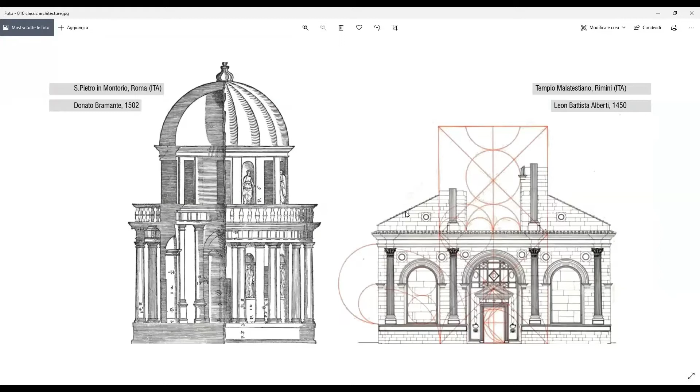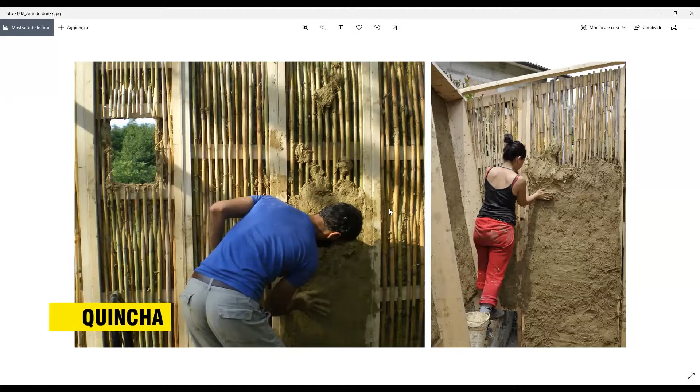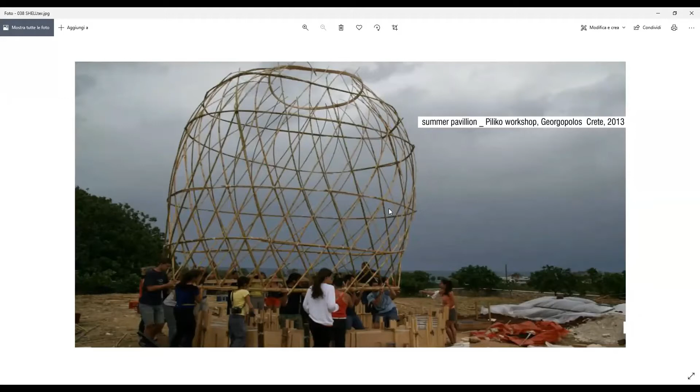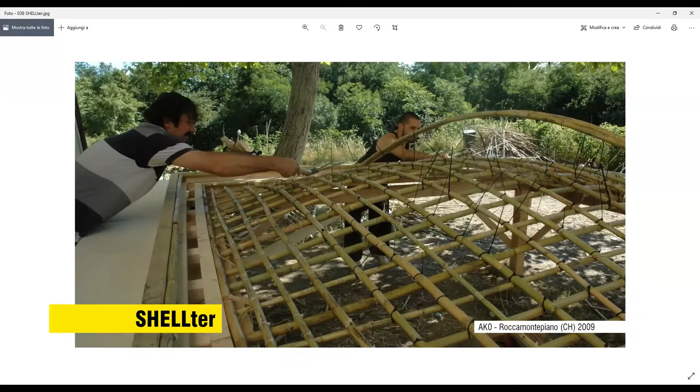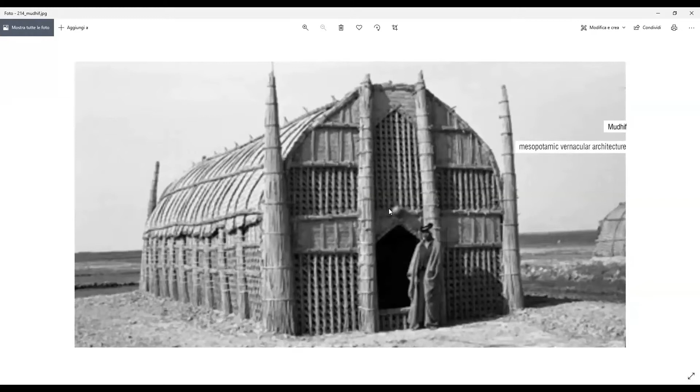So here you can see the rods I'm talking about a bit from closer. This is a little experiment where we did a dome structure with this. But the link to what I was starting from might be found here in the bundles of canes, because this is one of the simplest ways of using this resource, to join it into bundles and to use it as they actually did in Mesopotamian vernacular architecture for construction purposes. So the bundles of cane become the structural elements of the mudhif, as this kind of architecture is called.

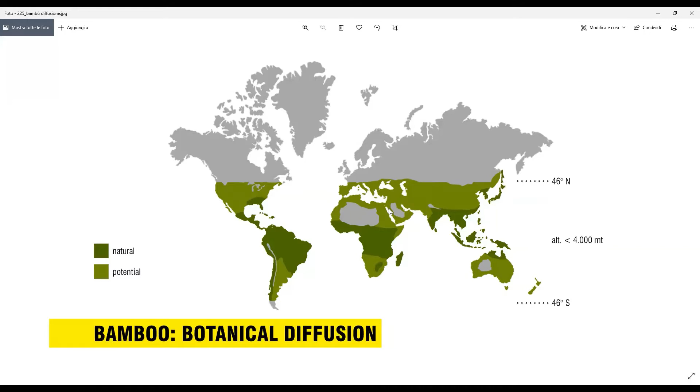But we also have bamboo here in Italy. This is interesting to show probably. Bamboo is, of course, a tropical plant, so it is not native at our latitudes, but it can grow. As you see, the lighter green, I hope you can distinguish it on the screen. Or better, I should say, the darker green is where bamboo is native, more or less. But it can grow up to 46 degrees of latitude. So the Italian peninsula is in that, and there are bamboo groves over the whole country.

Here we come back to Africa. This is bamboo from Côte d'Ivoire, and this is just to show the difference a little bit. We have bamboo in something like 1,600 different species, which also means, of course, different diameters and different strengths. So this here is a bit stronger than the one we have in Europe. We normally don't have more than 80 millimeters. It's already quite an exception to find. The normal is between 50 and 60 millimeters of diameter. Here we can easily find 100 millimeters.

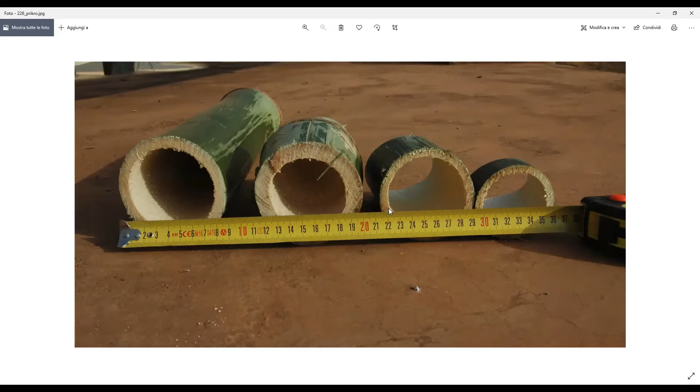And if we go to Colombia or Southeast Asia, we can find much larger bamboo also that can be used for building purposes. According to the dimension of the canes that we use, and here I say canes because it can be the giant reed as well as the bamboo, we don't need to make differences in that case. We can use them as bundles, as I said, if they're very small. So it makes sense to bundle a lot of them together. Or if the cane is strong and big enough, it can be used directly as a building component. The third possibility is to cut the cane in strips.

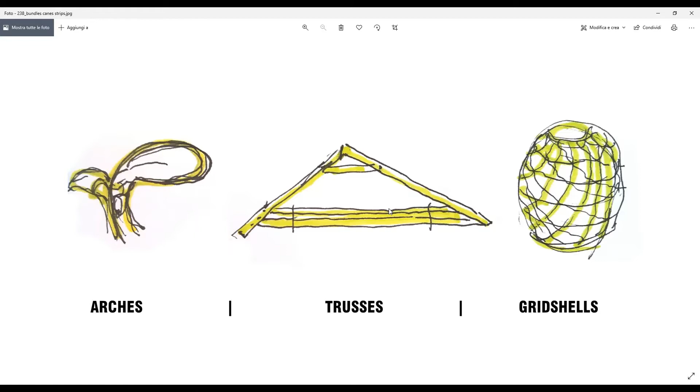Each of those ways of employing the material is also suggesting a way of building structures, of course. We already saw the columns as bundles of canes, but we can also have bundled arches. I will show you an example. We can, of course, have trusses made of straight or sometimes also of curved whole canes. And we can have, for example, gridshells made of strips. As for the canes, I always like to show this example by Cañaviva.

This is an architecture firm from Catalonia. They build structures like this with giant reed, so the Mediterranean cane again. And this is an example of entire canes used within a box truss. This is this solution where you can use 4 parallel canes joined together and held at a distance by other canes from the same kind, let's say. And so this gives quite a strong structural element that can be used as a pillar or horizontally as a beam.

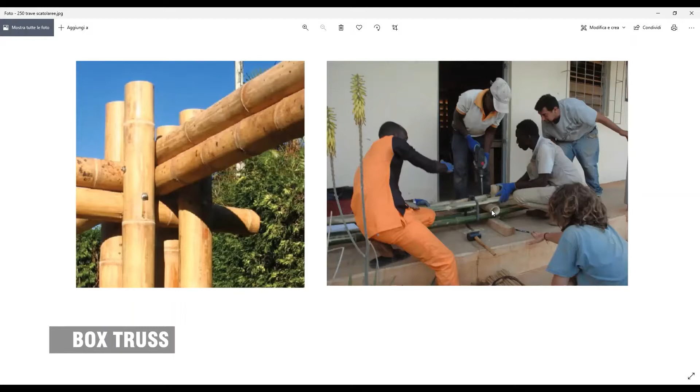The picture you see on the right is from a training session we did in Côte d'Ivoire, where we tried to use the local material because we discovered that there was bamboo available, but it was not used, if not for fences or very simple solutions. So what you also see in this picture, that bamboo is all but straight. Sometimes you find bamboo with very irregular shapes.

This is normal because it's a natural material, but this solution of box trusses with joining 4 parallel canes is, for example, one possibility to compensate this irregularity and still have elements that we can consider to be straight in our design. Let's say we can force the concept here a little bit.

The jointure is made with these wooden elements that pass through, and here, depending on the kind of bamboo, the joint, this is of course a weak point because you need to drill the material, and so this depends on how strong the material is, if it can stay as such or if it needs to be reinforced. But it is a very simple way of connecting the material.

This is what we did within an exchange program with European students from the University of Rome that we brought to Côte d'Ivoire to do a building workshop together with local craftspeople. And here you see some pictures where we also employed other techniques like rammed earth walls.

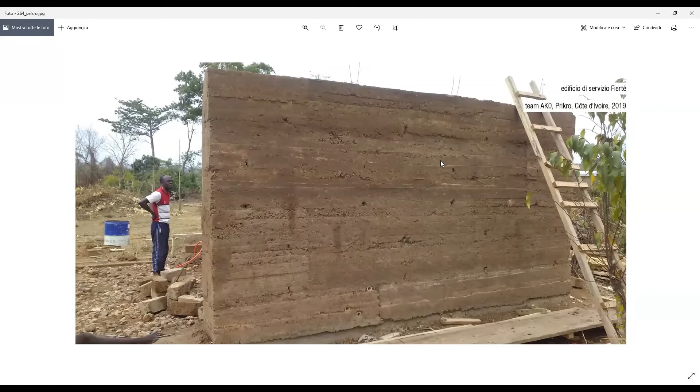And finally, the end product of this experience, of this collaboration, was this small building where you see again we have a bamboo roof made with these triangular beams or this roof structure, and this will then be covered with a straw roof. I have perhaps to mention that the difficulty of this project was that we were ready to start it in February 2020, exactly when COVID-19 appeared, and this made it impossible for us to go to Côte d'Ivoire.

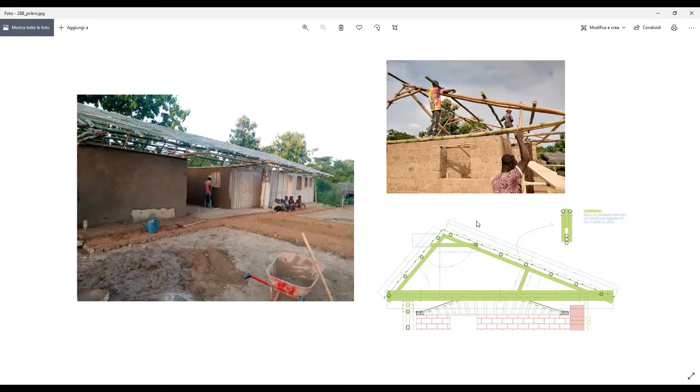So this project has entirely been built by local people, and we just interacted with them like we are doing now with online meetings, emails and WhatsApp calls, things like that. But it worked finally. So some small adjustments needed perhaps still, but the building is there and it works.

This is just another example from people you might know, because this is a published, quite well-known building. It's the school in Rudrapur by Eike Roswag and Anna Heringer. And this is just to show a larger possibility of employing straight canes joined together with nodes in order to have performant structural elements.

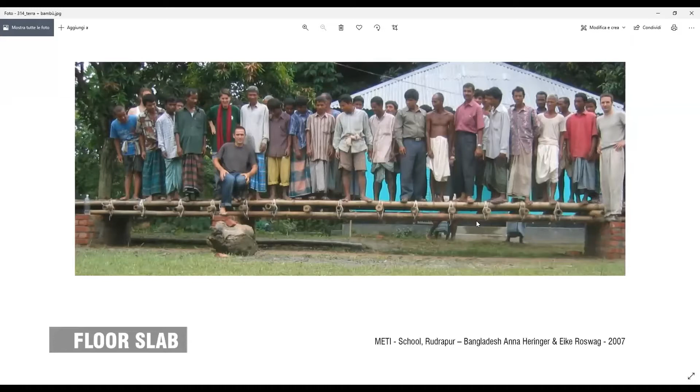This is an intermediate plane where this is the prototype they are using for the floor slab in this building that is made of cob at the lower level, and then completely in bamboo at the first level.

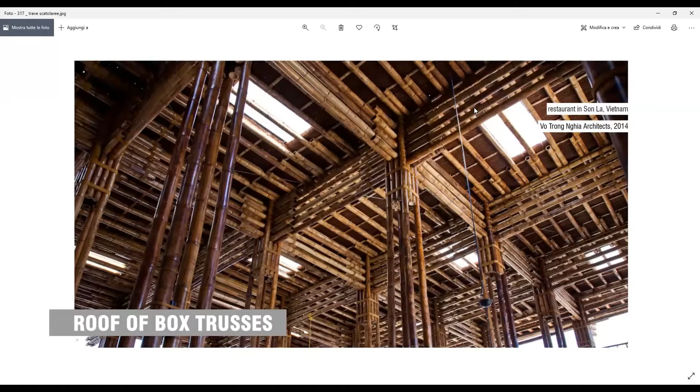Just another example from Asia. This is Vo Trong Nghia, Vietnamese architect who uses also these straight entire canes for this roof structure, where we have again this box concept reinterpreted in a slightly more complex way. Or this is Simon Velez, you also might know, from Colombia, who is suggesting for years solutions like that for industrial buildings or very large public buildings.

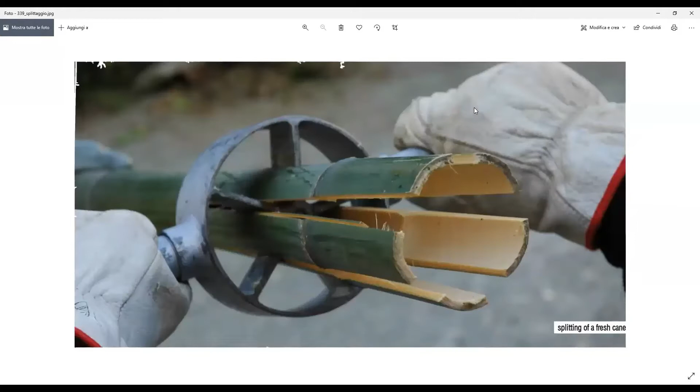As I said, a third possibility is to cut the canes in strips, and this is something, at least here at our latitudes, we do manually with this splitter, this tool that you see in the photo, which has in this case 5 blades, but according to the diameter of the canes and the size of the strips you want, you can use tools with more or less blades, 4, 6, 10, depends.

Or slightly more complex is the 3-axial weaving. This is this particular pattern where you get hexagons and triangles, and actually you can use the triangles to have quite stiff jointures, because you can make the triangle very small, and then the friction between the 3 strips that meet at that point is enough to have a quite performant jointure for the whole structure.

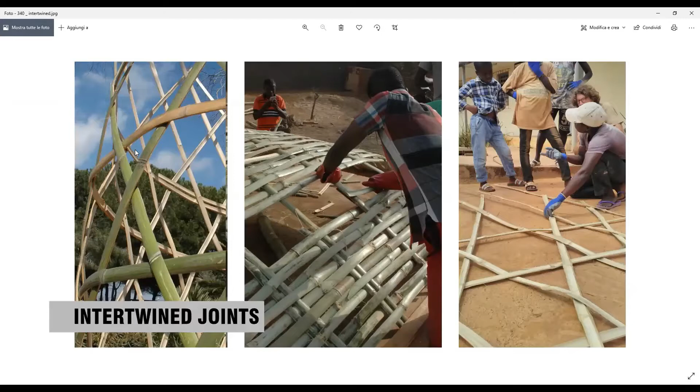This is again the biaxial, so the normal weaving. This is an interior design for a cultural center here in Rome, and this was for an interior design in an apartment. But no, here there's some mixture.

Sorry for that. This is a little pavilion that we were asked to build for a park in southern Italy, in Sicily. And here you see the 3-axial grid shell. This is the same structure within the villa. So very small pavilion. This is the interior design I was talking about before, within an apartment in Rome again.

And so actually this fact of using curved structure, something we discovered is that it really makes sense, because you can have quite stiff structures by using apparently weak material, because the bamboo strip as such is not very strong. It's a few millimeters of thickness of material, and it bends really strongly. But if you involve it in more complex structures, it can bring to very performant whole structures.

And there are mainly three methods to do that, depending on how much control you want to have on the design. Sometimes it's needed to have a very exact design, because you have constraints of some kind. It can be the client's desire, maybe constraints of budget, maybe constraints coming from the context, because there's already something built nearby and you have to refer to it in some way. Things like that can ask for a very controlled geometry.

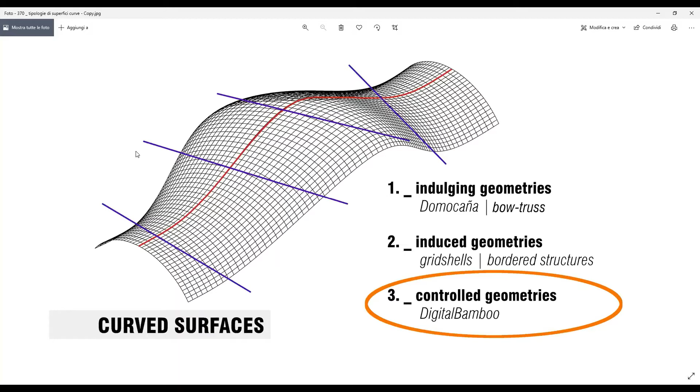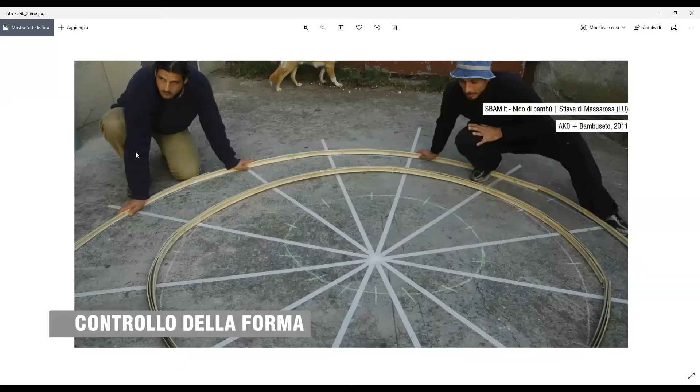So here we did a little experiment some 10 years ago, where we wanted a certain shape of a pavilion, of a grid shell. And so we started to draw some representative shapes of this form on the ground. And then we knew about the heights that we wanted. And all of this, very analogical, very manual, and very empirically, led us to have this little structure here that you see on the left, which had actually the form we wanted.

Because as you saw perhaps before, with the pavilions made with the three-axial patterns, you are quite constrained as for the shapes that you can have. They always look a little bit like an egg. They're quite nice shapes. It's nice to stay inside a pavilion like that. But if you want to go further to have other shapes, it's quite difficult.

Here we could have this difference because we constrained the nodes directly. It's not a three-axial pattern with the triangles as you saw, but we have bolts going through the nodes. So we drilled the material. But on this, we then went one step further, which is this pavilion, which is visitable in Rome, in the Casa dell'Architettura, the headquarters of the architects' chamber.

And so they have a little garden in front, in the center of Rome, and they decided to install this pavilion, mainly to protect this archaeological area behind, because they wanted people to go quite close to it, but they shouldn't touch it. So this was the solution that we proposed. And so this is a place where you can sit and look at these ruins or just have a rest.

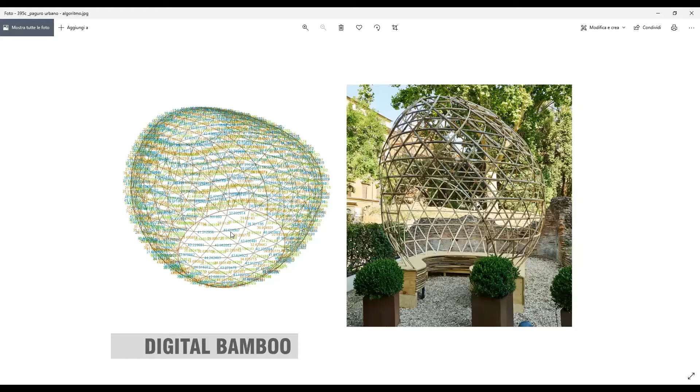So from that, the next passages are completely manual. This is something that normally does not happen with digital design. We are used to having digital design processes that feed their information into a machine, and then the machine produces numerically controlled output by means of a mill or a laser cutter or whatever. In this case, we do it manually, which is the secret to using natural material, because we haven't solved until now the possibility to feed a machine with a material that is irregular like bamboo is.

Each strip of bamboo is different. It never has the same size. The distance between the nodes, where the cane is a little bit harder, is never the same. And so this makes it very difficult to feed it into a machine. So this passage is made manually, but with the help of this assembly map. So the guy or the lady who has to drill the holes knows that the hole G10 has to be at 42.8 centimeters from G11 and so on. So you can have a prefabrication process, prepare all the material, bring it to the building site, and then reassemble it according to this map.

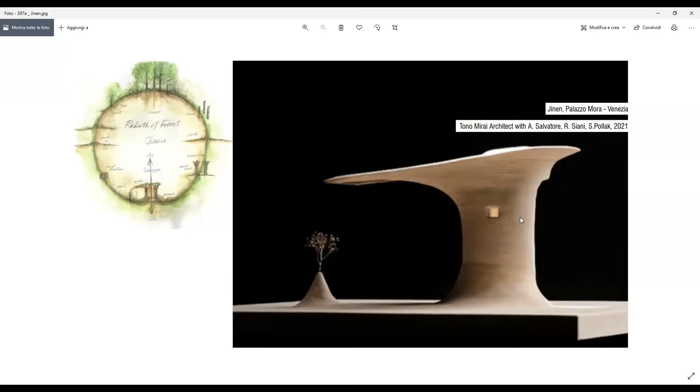This is what we also did in another case where we were contacted by Tono Mirai, a Japanese architect, who was invited to do an installation for the Biennale in Venezia. And his first idea was to build this kind of structure in raw earth on the terrace of an old palazzo, an old building in Venice. Of course, the authorities didn't allow that, because they said you can't build such a heavy structure on an ancient terrace. And so he had to find a plan B, and the plan B was doing it with digital bamboo again. And so we tried to design a shape together with Rossella Siani and Antonio Salvatore, another colleague who was involved in this design process.

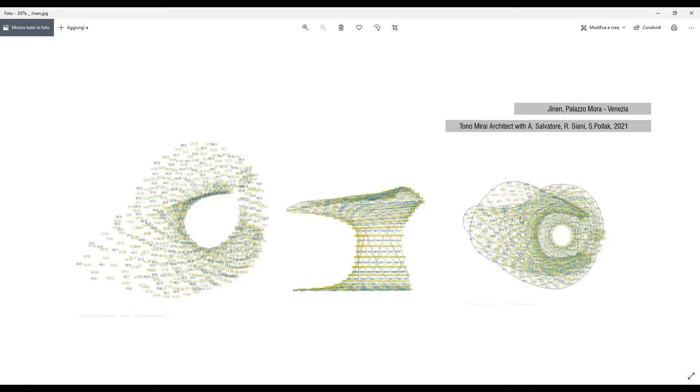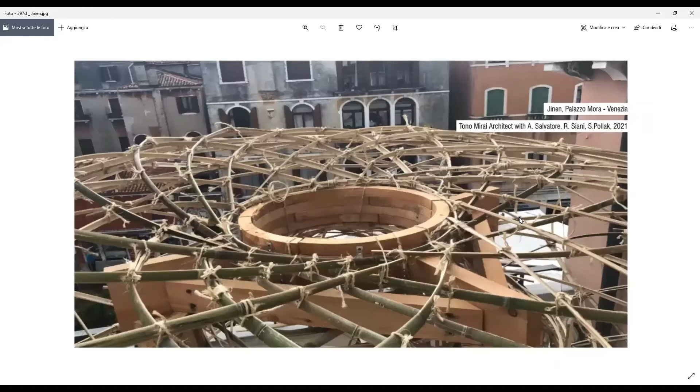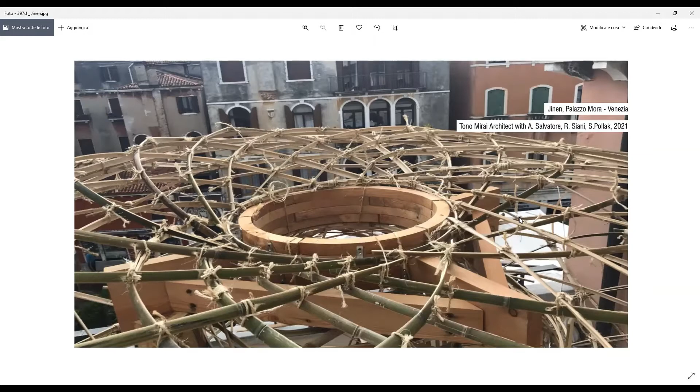And so the shape was redesigned with this method. And again, we had our assembly map that allowed us to build this installation. Here you also see the place. If you have a look at the joints, they are made directly with rope, with hemp rope. This was an explicit request by the architect. He wanted to have only natural materials. He didn't even accept the metal bolts that we used in other projects. So here you see the final installation. The central cylinder was then covered with an earth plaster, but the external shape is exactly like that.

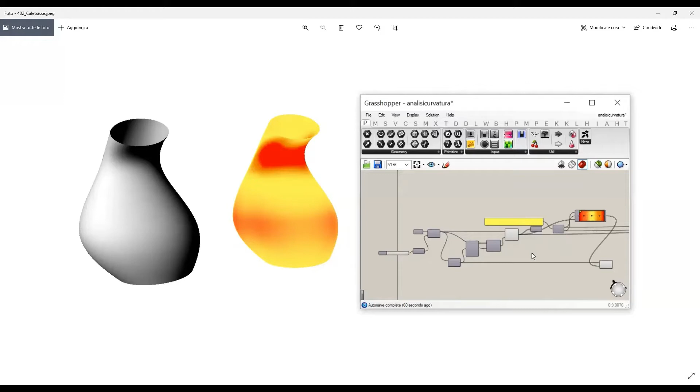What this drawing is representing is the curvature, the bending radius of each single cane. So we knew from the material the critical bending radius, the radius that we couldn't go smaller than. And so we fed the software with this information, which means that when we change parameters like the height or the central diameter, we can stretch this shape as we want while designing, but the software can warn us, saying, hey, pay attention, here is a red zone, here you will have problems with your material, please redesign, more or less, okay?

And then again, once the design was concluded, we plotted this assembly map, and with this assembly map, we went to the building site, which was here in a tent in front of the Congress Center in Kigali, and with the students from the university, we assembled this little structure in 6 hours, more or less.

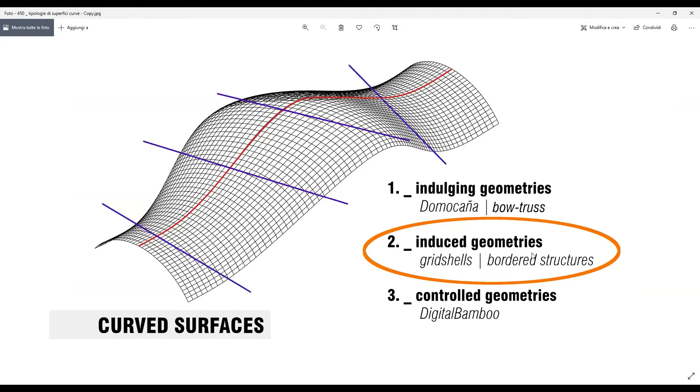Okay, but we don't always need, or we don't always have the possibility to use software. We can have other approaches, still having induced geometries, meaning approaches where we first design, because we need to design it in a certain way because we have our design constraints, and then we want the material to adapt to that. This can be done. I will show you two possible approaches for that. One is to work on the border conditions.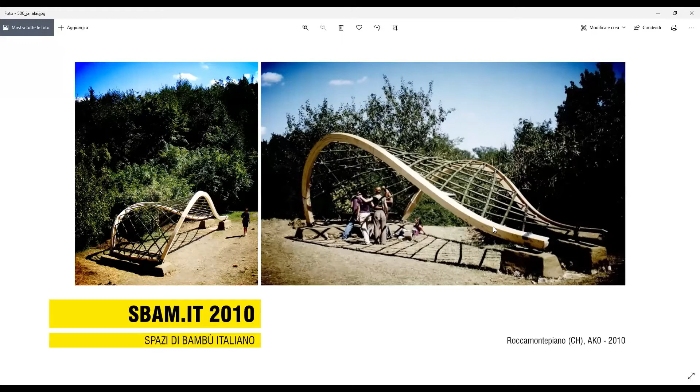So the example you see here is a shading pavilion in front of a youth hostel in central Italy. And what we decided to do here is to have very strong glulam borders made of timber. They give the direction, more or less. They steer the design, and then we have the bamboo grid that needs to adapt to that. But this is somehow freezing the position of the bamboo. Okay, this structure was then covered with a membrane just to make more shadow and also to be protected from rain.

The second possibility is the grid shell approach, where you start from a bidimensional pattern and then you just start lifting points. This works very well when you have patterns like the triaxial pattern, for example, where the canes can still slide a little bit between one another, so they can reshape while reaching the final shape that you want.

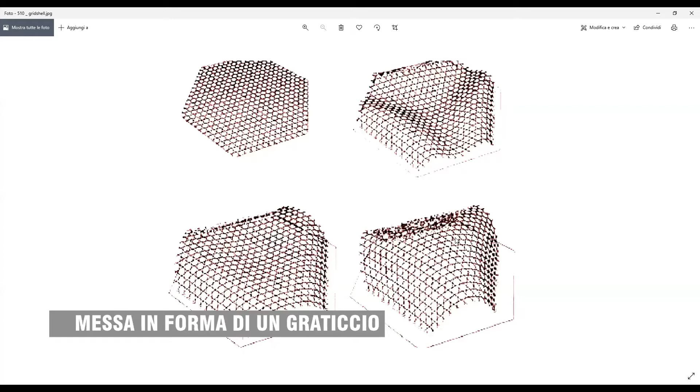Once you are happy with the shape, then you can freeze this by augmenting the friction between these strips in some way, by squeezing them with some additional bolts, or by tying them with ropes, or in any other way. But you can define the shape while doing it, just inducing the geometry you want, starting from a bidimensional pattern.

This is another example where we used the same approach to do the secondary layer of this roof structure. We already had these bent beams that you see in bamboo, and so this layer of triaxial grid was just posed on them, and it adapted to it, but it was woven on the ground, so bidimensionally, before bending.

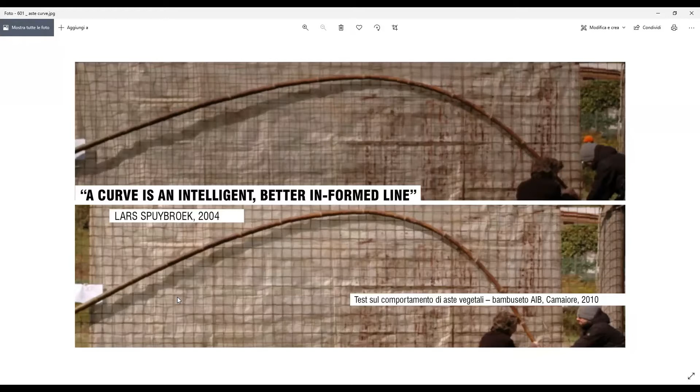And this brings us to the third possible approach, which is based on the fact that bamboo has a very typical way of bending, which depends, of course, on the fact that bamboo is stronger at its base and then becomes weaker to the top. And this corresponds to a typical bending radius. You see, it's not an arch, but it's a bit closer here at the end and a bit larger at the beginning. But it is something that you can really feel with your hands. If you take this cane and you start bending it, you really feel what the material wants to be. And this makes it very easy to communicate on the building site.

You don't need to have all these complicated things that we had before, a myriad of numbers or things to tell to craftsmen. Here in this case, it's just one measure. You say you want this distance to be, let's say, 1 meter or 90 centimeters, whatever, and of course you need the length. But then the rest comes. The exact shape comes from the material. It's the material which determines what it wants to be.

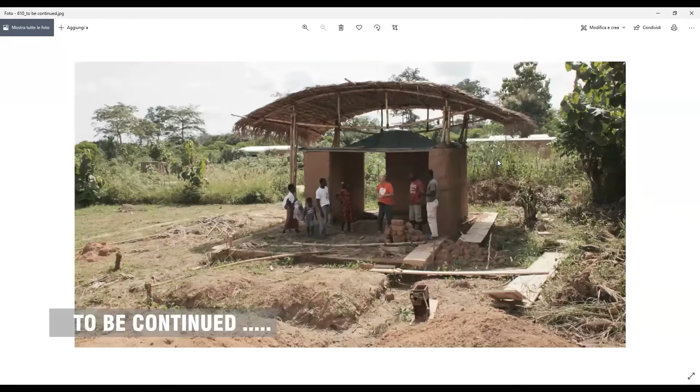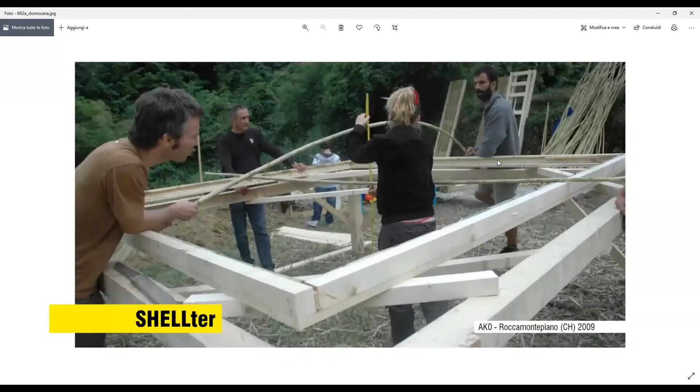So this was the prototype for a roof structure for our little building in Côte d'Ivoire. We then changed this roof because it was not possible to cover. The slope was not strong enough to have a completely natural roof, which we wanted, and so then we passed to the triangular solution that you saw before. But the beam itself was quite strong, so this can be used as a solution. Again, what does it mean to work with so little information and to have the design led by the material? So this is what I'm calling inducing geometries.

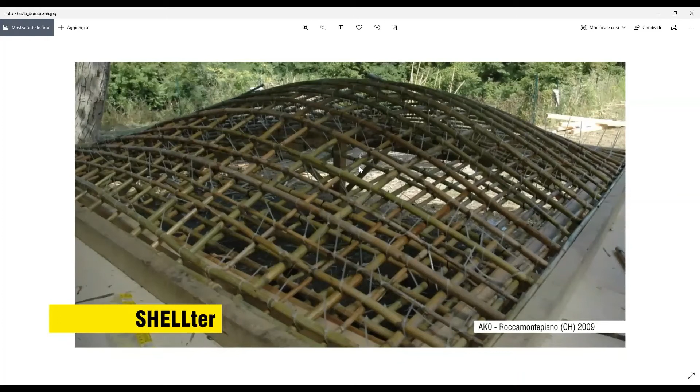Here we are building a dome structure called Domocaña, which is a Peruvian invention that we adapted. And the lady in the center here is just measuring, for our curiosity, to know how high this arch could be. But actually what you do when you build such a structure is to start bending the canes. Normally the first 3 or 4 crack, you have to throw them away, but then you find the right dimension and you can go ahead and have structures like these, which are really strong. We got on top of that with 5 people without any cracks. And it can take even much more load.

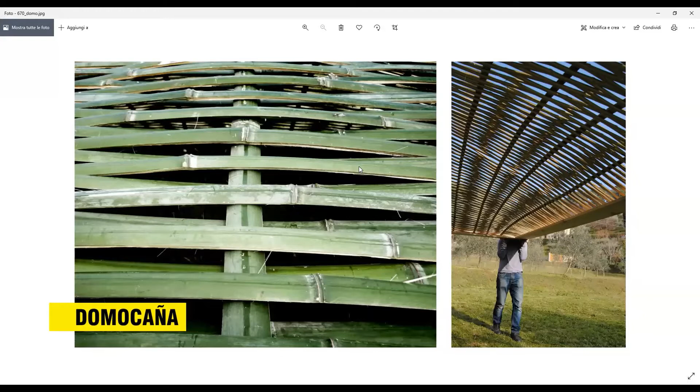This is the same issue but made with bamboo strips, while the others were made with reed canes. Here you see, okay, this is not the heaviest person in the world, but you see that it's quite resistant even with these weak strips.

And so with that in mind, we did another workshop again in Côte d'Ivoire, where we tried to build such a roof structure with a group of beekeepers, because we were invited to participate in a meeting of this association of environmental activists and beekeepers. And so they asked us to introduce the concept of sustainable architecture, and we decided to build such a roof structure.

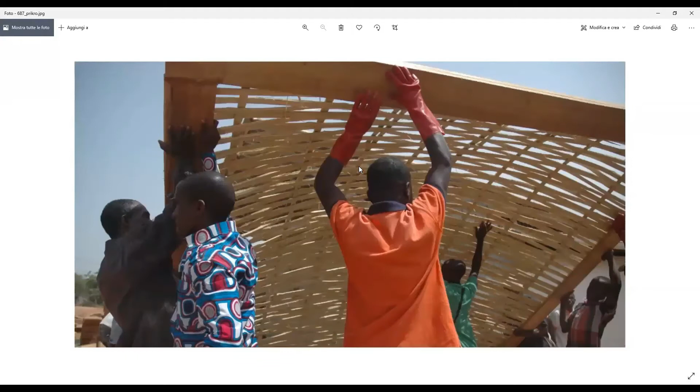And again, it proved that it was really easy to make the building concept clear without complicated drawings, without numbers or things like that, just because the material already contains a lot of information on its own behavior. I would almost say, bamboo already knows what it wants to be. And so this made it easy to weave this dome, which was then relocated and brought to a piece of land that this association owns.

So here you can see the movement with a pickup, and it was brought here on this terrain. Again, in this case, to be used as a shading device, but actually this can be a proposition for a roof in these climates where the bamboo canes are available and can be even more available because the climate is suitable. So we can also think about growing more of it.

And it's really involving. This is perhaps the most interesting aspect of this. You don't need to have big previous preparation, because the material really helps to involve all kinds of people in this building. Of course, what is not solved in this picture that you see is issues like the waterproof layer, or other things that are very important to really be building.

In this case, this solution here was used as a false ceiling under an existing roof. So it was not the issue in that case, but this is something where further investigation is probably necessary. And I'm happy to hear from Randy that there's one topic of local talks on tropical roofs. So perhaps I should have a look at this. Probably some answers are already there. Okay, that's it from my part.

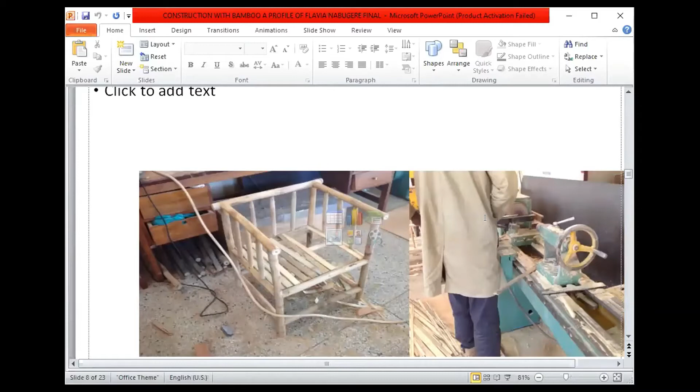We make structures like furniture, and somehow we are learning how to manipulate bamboo so that we can make better structures. I was looking at the presentation before, and I'm like, when do we get there? Because for us, we are simply at the very stages of trying to see that bamboo can be used for any products that can be marketable.

And that does not mean that bamboo has not been used for construction in Uganda. There are tribes or areas like in the northwestern areas of Arua and Moyo, they use bamboo for construction. They construct using bamboo in a very local, simple way. And I liked it so much because we have been worried, thinking we really need so much technology.

When the architect, the presenter before, said that the bamboo itself is the one that leads you or guides you on how to manipulate it or how to handle it. And so that is what we are doing. We can train and guide in nursery establishment. We also offer a promise of a market to bamboo farmers.

Now, I'm going to talk about bamboo for construction. This bamboo has to be treated to prevent attack by borers. We have had so much experience. As we started using bamboo, we would get disappointed when we find it crumbling into powder. As I looked at the first presenter presenting that final product of the structures, we also tried, only to find that ours would be eaten by borers.

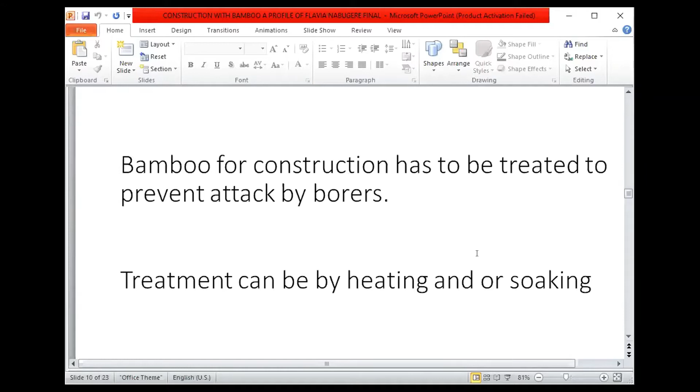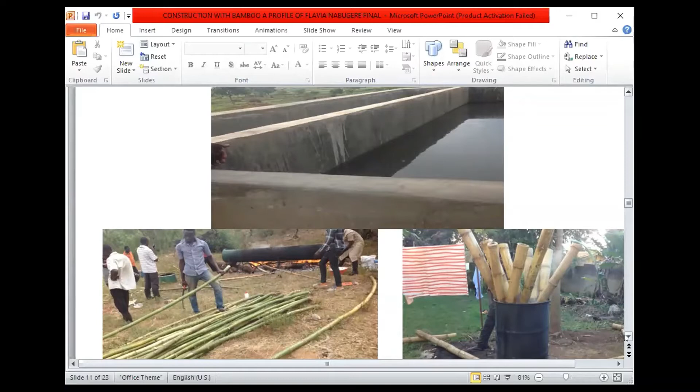facility. And then in a simple way, this is at our place in the city where we have the demonstration here. It is in the rural area. So we have again to improvise to be able to boil our bamboo in this drum. And what we do is to cut very short ones, and then we turn them round so that we don't have to struggle so much.

So construction using bamboo. Bamboo offers low-cost construction materials. Yeah, when we have tried to use timber cut from these other trees, they turn out to be quite expensive, but bamboo is rather cheap. It is available, it is all over. The only problem is what kind of bamboo, how mature can it be?

At Uganda Bamboo Association, we offer bamboo raw materials which can be used for construction, which can be used for other products like furniture. But we also pile up the bamboo which would be useless, to use it for energy. We offer training in handling bamboo. And also we source skilled builders to use bamboo for construction.

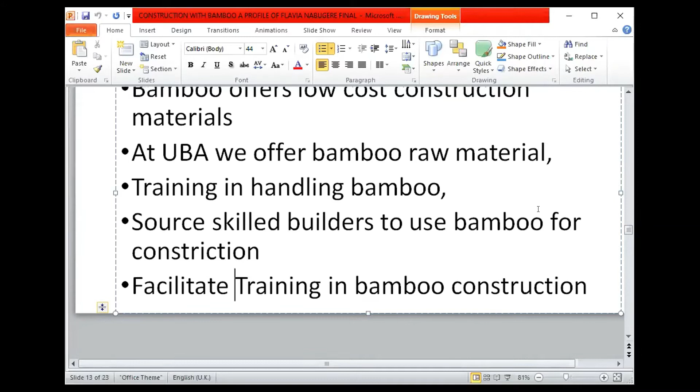powdery. So we source the skilled ones and we expose them to the use of bamboo and how they can use it, not with so much technical know-how and not with so much training, but with the experience that we have attained. So we facilitate the training in bamboo construction by lobbying those who know how to train. We are on the program of the Dutch Sino-East African Bamboo Program. So once in a while, we are getting experts coming in who train our people to construct using bamboo.

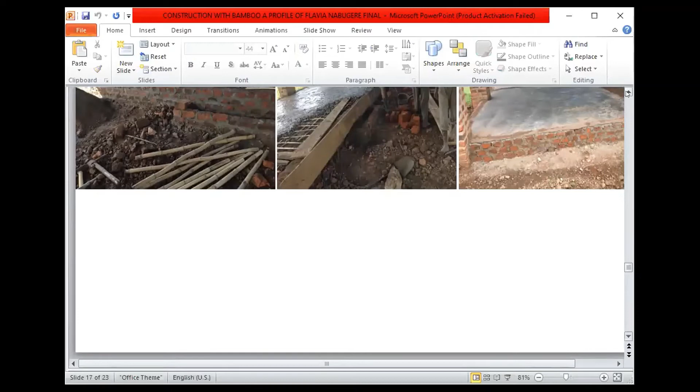Yeah, sorry a bit. I think I'm having a bit of challenges with the technology.

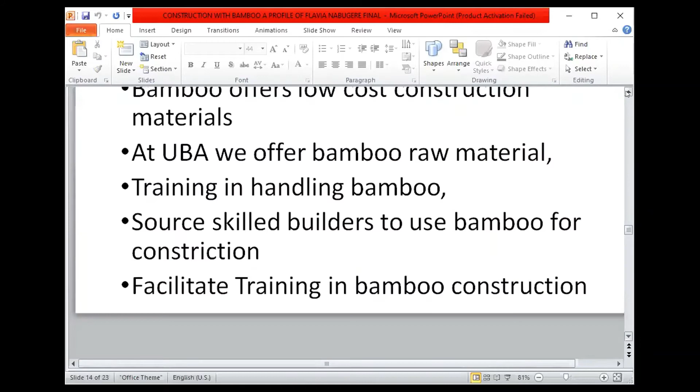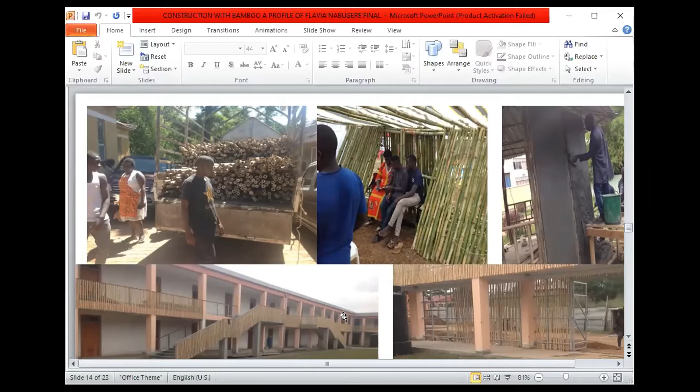Yeah, so bamboo can be used for construction at many levels, for the rural poor and even for the rich. Bamboo can be used to build decent classrooms in disadvantaged schools. In our place here, sometimes you find schools where students are sitting on the floor under a tree. We plan to announce bamboo and to show that bamboo can be used to set up even simple structures.

And one of our clients, called Life Shelter International, they have got bamboo from us to build cottages which can be used as schools in refugee camps. Bamboo can be used also to build decent classrooms in disadvantaged schools. Bamboo can be used to build churches and furnish them. As seen above, bamboo serves for cheap but beautiful decorations as well.

Besides, bamboo can be eaten. I think you can see these, the shoots which are being processed into salad.

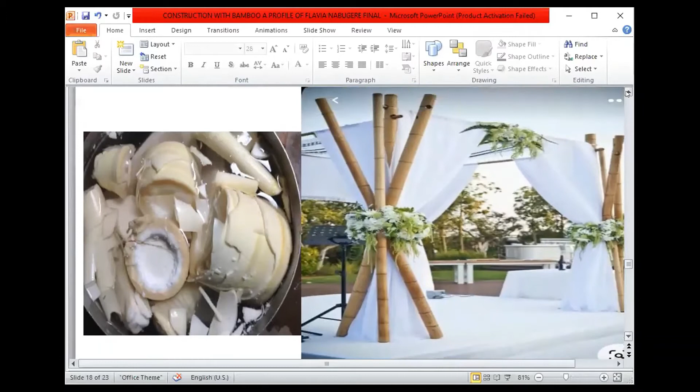Yeah, so benefits of bamboo. So apart from construction, bamboo has many uses in environmental protection, in employment creation, offering food for humans and for animals, that's fodder for animals. It is used in entertainment, it is used in sports, making paper, pulp, timber, and energy products. As we can also see, it can be used for event decorations.

And while bamboo is among the future cash crops, bamboo has wide application and can be made into more than 10,000 products, while it has over 40,000 uses. It grows widely, globally in all countries, continents, with just little limitations in Europe. It grows very fast and is ready for use in 3.5 to 5 years and is also renewable. Products of bamboo cover all sorts of appliances for domestic, executive, and other uses.

The uses of bamboo include, therefore, human food, animal fodder, energy, firewood. That is for energy. You have firewood, charcoal, briquettes, gas, electricity, and other modes. And here at Uganda Bamboo Association, we demonstrate up to gas. We fire bamboo in a pyrolysis machine to make charcoal, and at the same time to get byproducts like vinegar and tar. Tar is some form of crude oil, which can also be processed by the chemical industry, which we are doing nothing about.

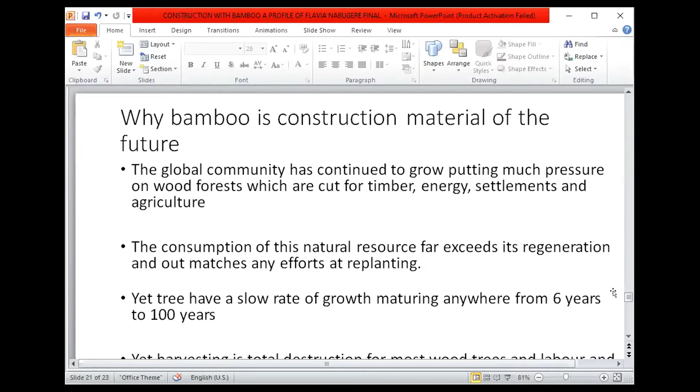The global community has continued to grow, putting much pressure on wood forests, which are cut for timber, energy, settlements, and agriculture. So the consumption of this natural resource far exceeds its regeneration and outmatches any efforts at replanting. So bamboo now wants to stand out as something that can come in as a solution. When you look at the tree, it has a very slow rate of growth, maturing anywhere from 6 years to 100 years, as compared to bamboo.

Yet harvesting the tree is total destruction in most cases for most woods. And then it is a labor-intensive exercise, and expenses are incurred if one is going to restore, if one is going to replant. You do total destruction, then you have to plant. And yet with bamboo, we are going to see the case of bamboo. It grows and multiplies very fast.

Within 2 to 3 years, a bamboo plant has many shoots that can be harvested individually. Maturity is 3.5 to 5 years. The plant itself, or the forest, can last 50 years to 120 years, beyond the lifespan of most people. When harvested, bamboo produces many new shoots very fast to compensate for what has been harvested.

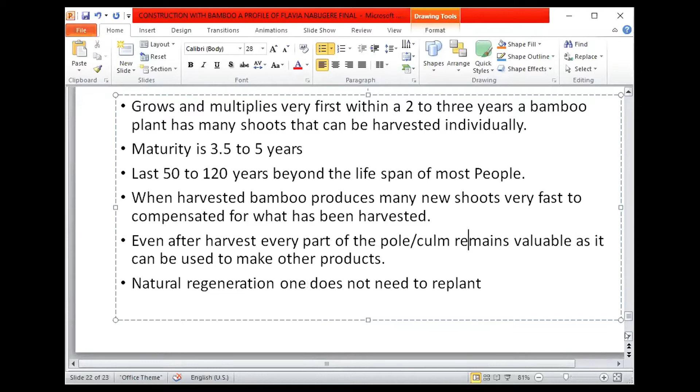Then bamboo has natural regeneration. You don't have to replant. You can use it, but you don't have to plant all the time. Once planted, it will be there, it will continue to grow. You keep on cutting, you continue to receive the same product over and over. Each individual culm is the one you consider when it comes to cutting and utilization.

So coming to the conclusion, bamboo is a marketable product having wide application. Hence, it is easily in demand, and its global spread makes it accessible for the global poor, while its beauty and versatility make it desirable for all classes. Moreover, as a construction material, it is easily replaceable, having the strength of steel. It has the strength of steel, and when properly handled, it will last 50 years and beyond, even up to 200 years. That is, if properly harvested at maturity, and also if treated properly.

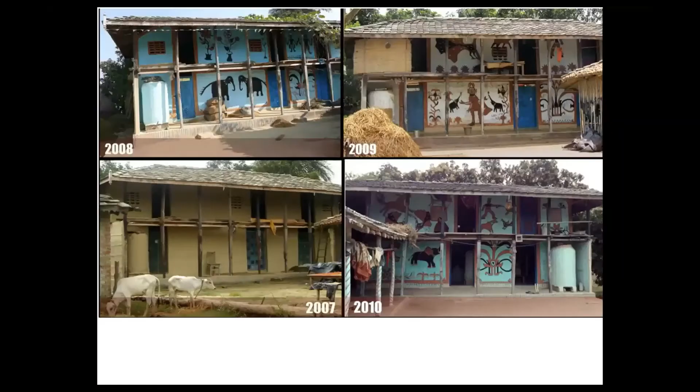Or look at this same house that I was documenting for 4 years. Every year there's a big monsoon and it washes off the paint, and they use natural dyes and wheat paste and paint it again. So painting and maintenance is not seen as a problem, but as a ritual. Every year they paint it differently. A lot of people come and paint it. So it's a living tradition.

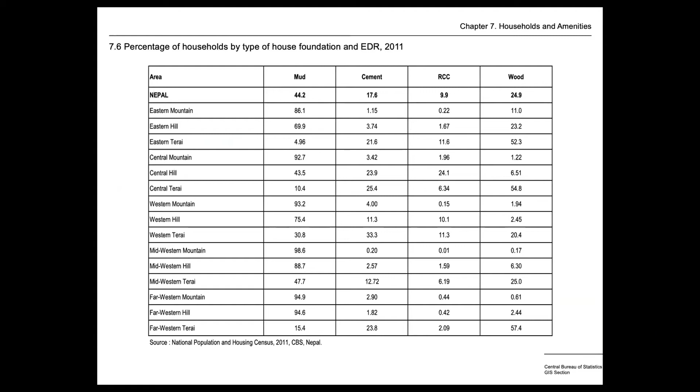As simple data, in the whole country, there's only 17.6% cement. The rest is all wood, mud, bamboo. All these buildings made with earth or lime or bricks are now dismantled and rebuilt with concrete, and it doesn't represent anything special. It doesn't have the unique identity that traditional buildings had.

Like if you look at Kathmandu now, a lot of people, when I say I'm from Kathmandu, they have a very romantic vision of the place. I mean, it definitely has a lot of rich history. About 10 UNESCO World Heritage Sites are in this location, but because of our poor planning and this crazy fetish for cement, we've turned it into this ugly concrete jungle, right?

And why are people doing it? Because there is an illusion that it is modern, it's strong. But as we saw in the last earthquake, at the epicenter, even these big concrete buildings, which are reinforced and known to last for hundreds of years, collapsed like a house of cards, while traditional buildings, properly built, did survive the earthquake. So in this context, we wanted to build an organization that would look at traditional architecture and try to put it in a modern context, right?

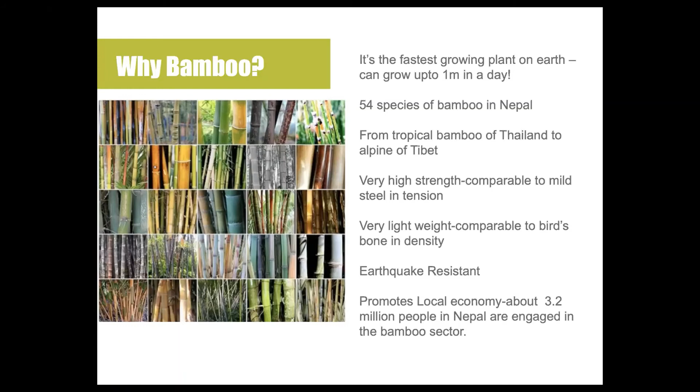Many people actually compare it to steel, but I think it's a wrong comparison. It's much better than steel. Steel is strong, but heavy. But bamboo is strong, but lightweight. You'd rather compare this material to carbon fiber or very high industrial materials that are used in aircraft engineering or very high-tech science. And it's earthquake resistant, it's very elastic. If there's a shake, it will bend and wobble and come back to shape, right?

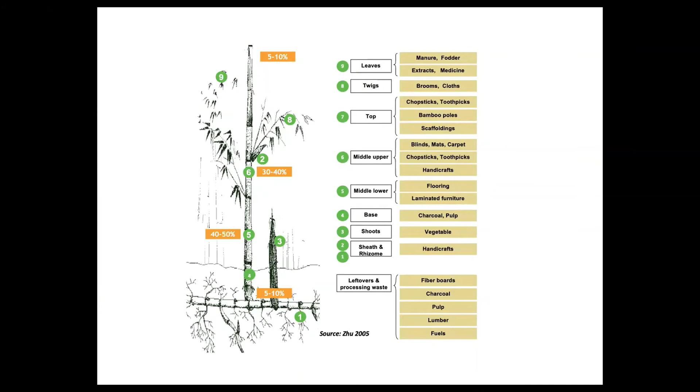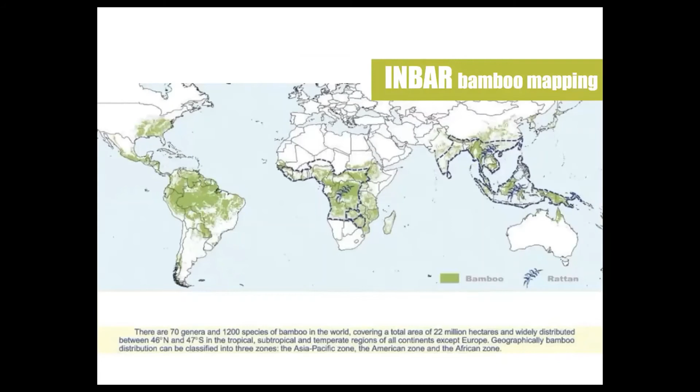Just to give you the anatomy of bamboo, it's long tubes, and these tubes have a lot of sugar molecules. One of the reasons bamboo is very strong is because of these tubes, but the reason people don't use it is because in these tubes there are a lot of these sugar molecules. So as was mentioned in the last presentation, one of the major problems of bamboo is treatment. If you don't treat it, it does not last for long, right?

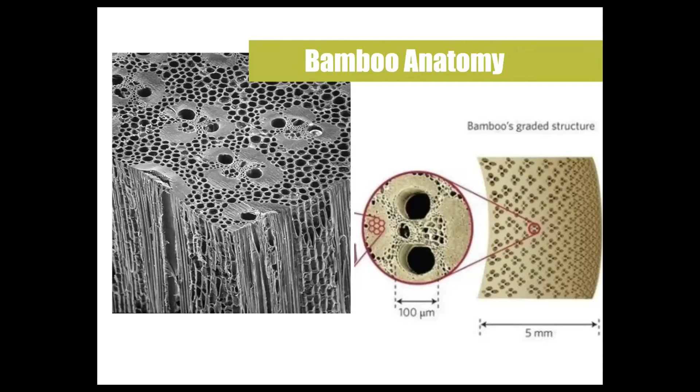In our countries, building is a very expensive process, right? So people only build if they know it will last for hundreds of years. So when we started this, the biggest question I always got was, how would you make sure that it would last for a long time? So when you zoom into bamboo, you see these sugar molecules. The other problem with bamboo is the sugar content and the irregularity. I don't think that's a problem, but if you talk to engineers, they say it's not a homogeneous material, right?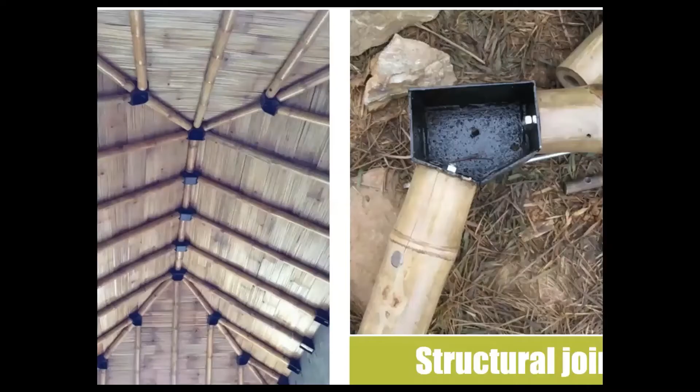So how do you connect? We've been experimenting with different ways to connect bamboo by acknowledging that it is a heterogeneous material. We did a lot of experiments, and we found this interesting technique where we use a metal plate which is slightly bigger than the bamboo, so it can accommodate any variation of a few millimeters. So we're not standardizing the bamboo, but we're standardizing the joints, right? Because joints are known to be the weakest link.

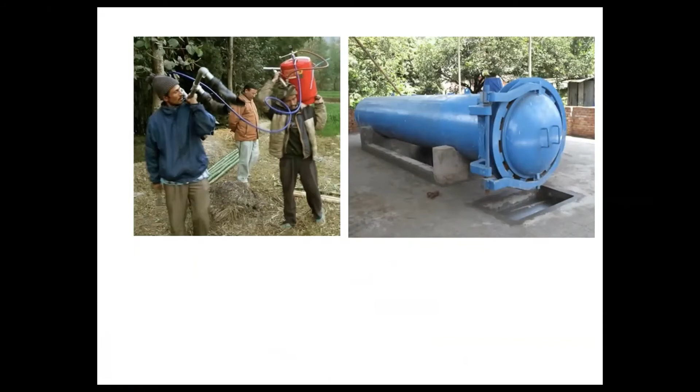And the other limitation was its treatment. So we improvised, so to speak, a traditional technique of treating wood into bamboo treatment. There is a simple pressurized cylinder where we put preservative and then lock it. And you see a bicycle pump; you use this bicycle pump to apply pressure to this tank. And this pressure pushes the preservatives in and pushes all the sugar out of the bamboo, right?

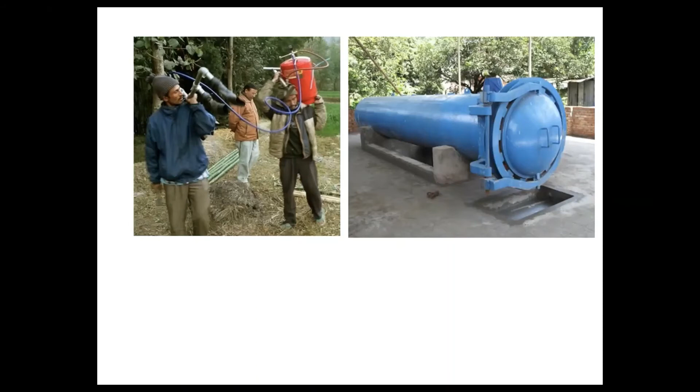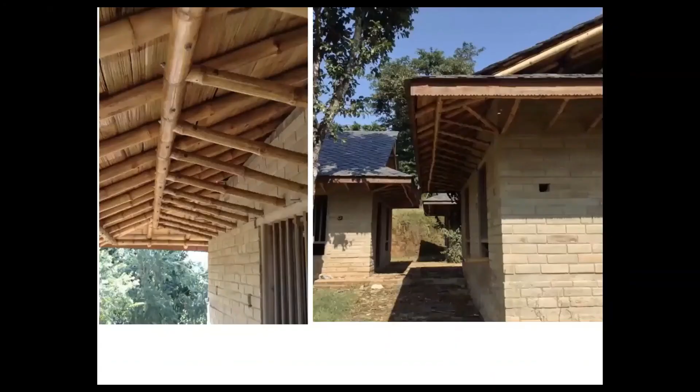So we used modern engineering with traditional material to build big span structures like this community hall. It's about 10 meters in span, just using local material, nothing fancy, very cheap to build. We built this whole building for less than $10,000, it's just unheard of. It's about 200 square meters, right? It's pretty big. And once we built this, the confidence level was getting better.

We have a lot of very poorly built government schools. They use cement blocks, metal trusses, and galvanized sheet, and the performance is so bad thermally. If it rains, it makes a lot of sound. If it's hot, it gets very hot. If it's cold, it's too cold. Three to four months of the year, we have to close school because in these classrooms you can't teach. So I'm thinking, why don't we use local materials like stones and bamboo to build a primary school? So we built this structure.

If you look at the stonework, it's all hand chiseled, all traditional technique. The stones are slates, and the trusses are bamboo. We added some skylights. Inside, this is earth plaster. There's no cement, there's no stabilization. We just use natural glue. We improvised those drain pipes to make these play spaces. We added beer bottles to let light come in. Very simple, a very low budget, and using just local resources.

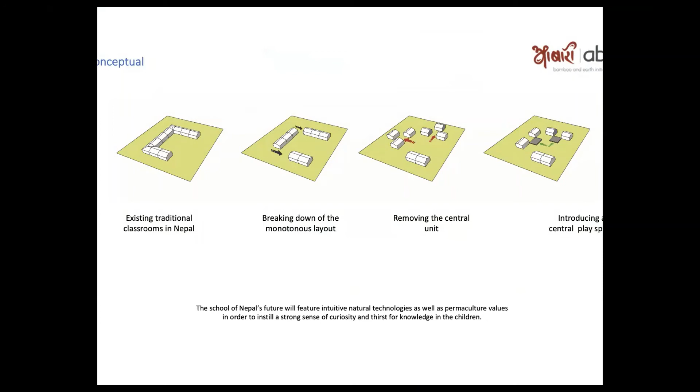So we built this proposal for the Department of Education. Interestingly enough, I thought we'd have a big battle to convince them, but they were so convinced by what we had done previously. They approved this building. This is a traditional U-shaped design, like I explained. We just modified it, put some open spaces in between, some skylights, some insulation, some natural paint, some niches, did some rainwater harvesting, all these basic, simple things that can make a big impact.

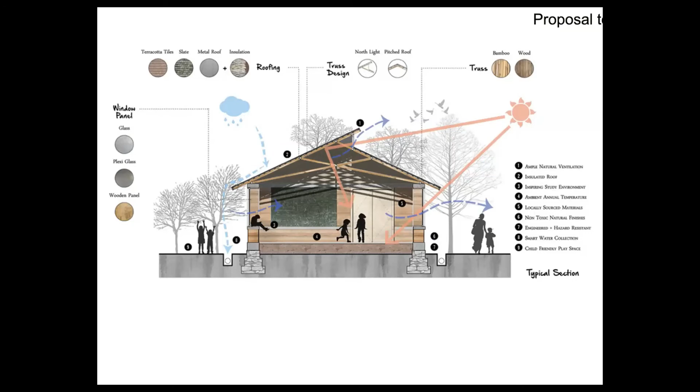There were so many schools that had to be rebuilt. We didn't have the capacity to go and build all of them. We are a design and build firm, and there's a lot of training involved in this construction. So what we did in that context is put out open source documents on our website and in newspapers, so people can just open our website and get all the details on how to build the school. And it was copied in many schools. We were pretty happy with how it came out. There are different permutations.

We live in the mountains, so we don't have big fields like you guys do. So we have to have small modules and then do a few interpretations. So this is one of the schools. If you look at these bricks, these are locally made earth bricks. These are not burnt bricks.

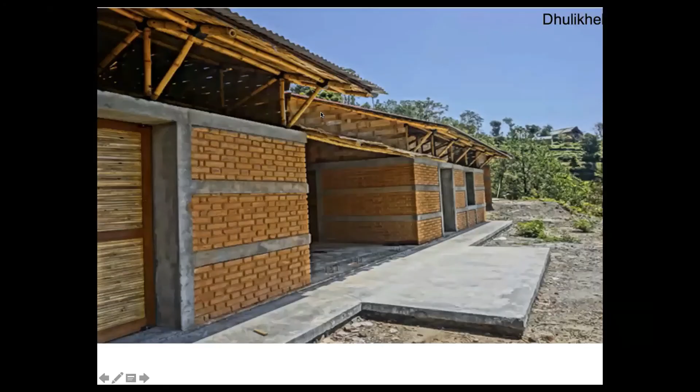And the roof is, of course, bamboo. We have this open space, beautiful woven bamboo on top, which diffuses light. We have these reinforcement bands. We usually try to hide that in our private buildings, but for public spaces, they get a kind of psychological security when they see this. Very spacious, very basic, very fundamental, so to speak, right?

Here's a different one, and this is inside the classroom. The temperature is so cool; when you sit inside, it feels much better compared to outside. Even the furniture you see here is modular, it's made with bamboo, it's lightweight. You can pull and stack one on top of the other. You can write on these benches, you can connect them together. You can make a U shape, you can make an O shape, just using local resources.

And here we are teaching women how to make those bricks. It was so simple. People ask me, what is the cost? And I say, whatever the cost is, it's a good cost because it's going to local people. It's not going to an industry. Sorry, part of it is cut out, but

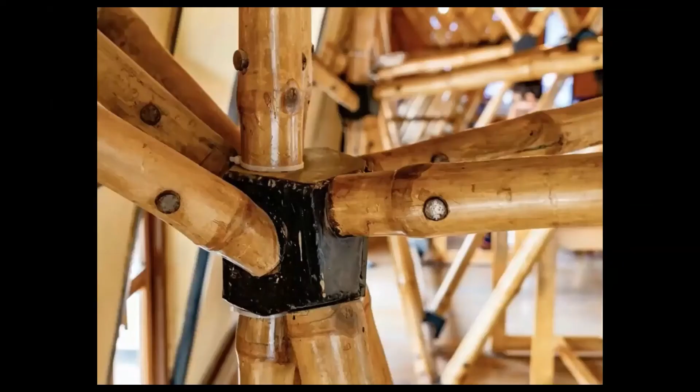It also uses the arch concept, and we used a lot of local vernacular typology when we built this. Everything here is local earth, right? We love earth. And here are some of the joints, some of the different setups. This is from outside. It gave us big confidence to build. And after this, we were invited to do another school. People were also confident; slowly we're changing how people see the material.

So this is another school in the west of Nepal. It's also in a very hot climate, so we wanted to design it such that there's a lot of openness. There's a courtyard, and we have thick 40 centimeter rammed earth walls to give that thermal mass. We use local clay. We don't stabilize with cement. We reinforce it, but we don't stabilize. We reinforce with 2 bands of 10 mm rod, and then we cap with a concrete band on the top and the bottom, but that's about it. It's just pure good old earth.

And then a lot of open spaces, like mango trees. We don't have any flowers or anything decorative; these are vegetable gardens, so the kids can come and pluck the vegetables and get them cooked. Sand pits. You see these patterns in the rammed earth. These are different clays. These are not painted on top. A bamboo facade on the top floor, so it's lightweight, while the bottom floor has the thermal mass.

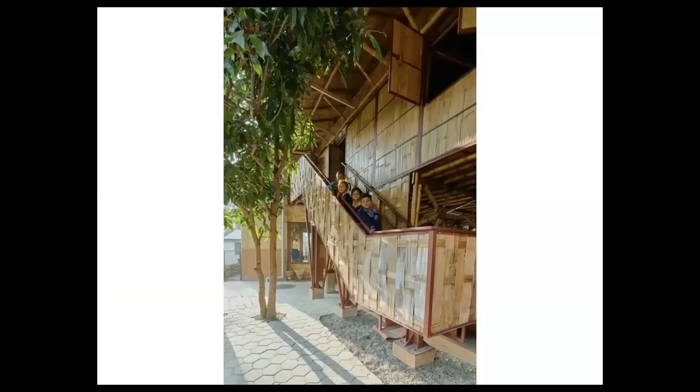This is in between the classrooms. We have this open space. We have this intricate truss that also works as a play space, so we encourage the students to climb on it. And these are our happy students there. This is the inside; the temperature is really, you can really feel the difference.

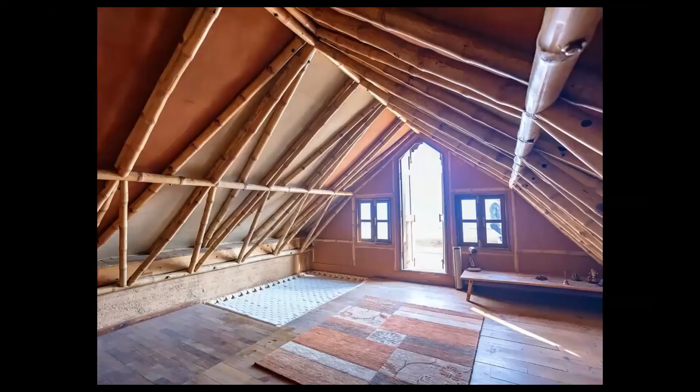So we're doing more and more stuff, there's more confidence. This is a house in the city, just using bamboo furniture, bamboo roof. This is the kitchen, using a traditional kitchen, putting in some modern plumbing and electricity. So trying to bring both worlds together. Here's the attic, with this bamboo truss.

Here's another truss. And as I said, we do a lot of public spaces, because we believe that you can do something that the public needs. It's a social enterprise, right? And also make an enterprise with it. And to end, these are our products. In the end, we also look at where we get our materials.

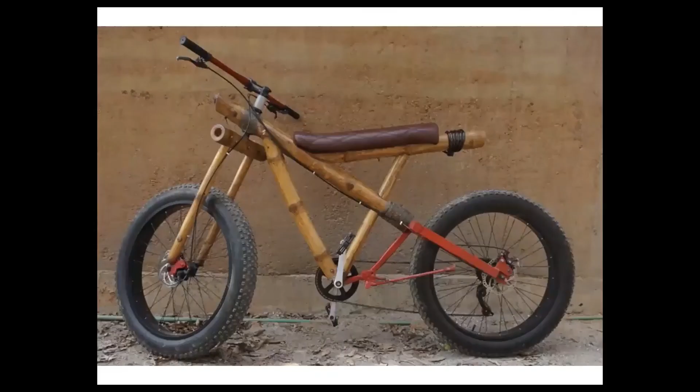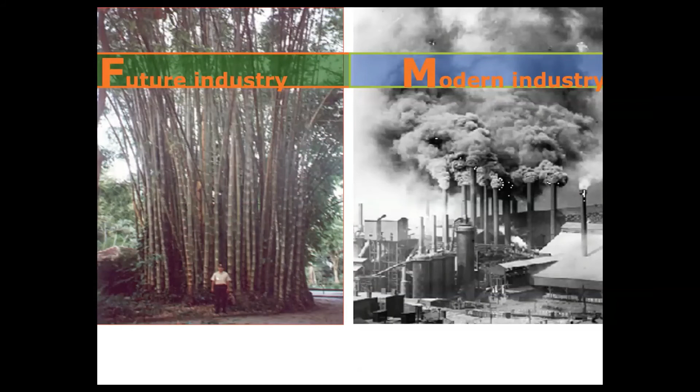And we also do a lot of products. As I said in one of the earlier slides, there's nothing in bamboo that's not usable. The top part we use in bags and to weave, and the bottom part we make bicycles or houses. So this is how I envision a future industry to be: to take in carbon dioxide and release oxygen, as opposed to the modern industry, which is so extractive and polluting. With this, I'd like to end my presentation.